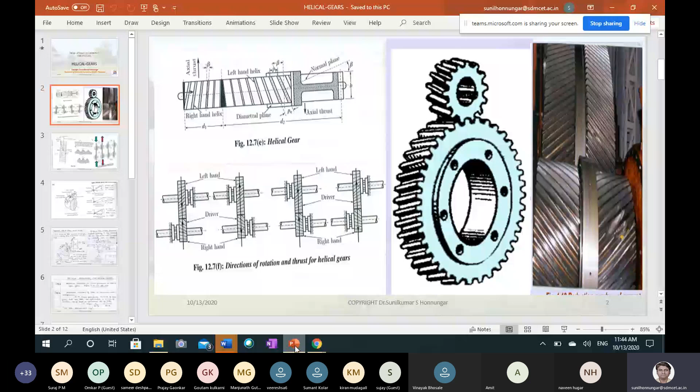Okay, I am continuing. Am I audible? If I am not audible, Rohan Rangoli, if he is there, please call my phone number immediately if my voice goes off. Of course, I get the information here in case of signal problem. Amit, please unnecessarily don't unmute yourself. I'll come to know who has muted, who has unmuted. Don't waste my time and your time as well. I'm just continuing, otherwise the continuity will go.

Okay, so that axial force will come. That axial force will be along the shaft axis. Just look into that shaft axis, and it is very interesting and sometimes confusing as well. Okay, 1 second, I don't know what happened. Am I audible? Yes, sir. Okay, fine.

So this is going to be the shaft axis. So what you have to do, looking into the direction of the rotation of the gear, you should use your right hand thumb rule. Suppose this particular gear, 1 second, this particular gear is rotating above. This is a gear, this is a pinion, smaller one is pinion, it is rotating in this direction.

So show your, I think I'll start my video. 1 second, I think I have switched my video off. I'll just start my video as well. I think still people are pouring in. Abhishek Naidu. 1 second. This is a problem. I think now you can see me. Okay, fine. 1 second. Share screen.

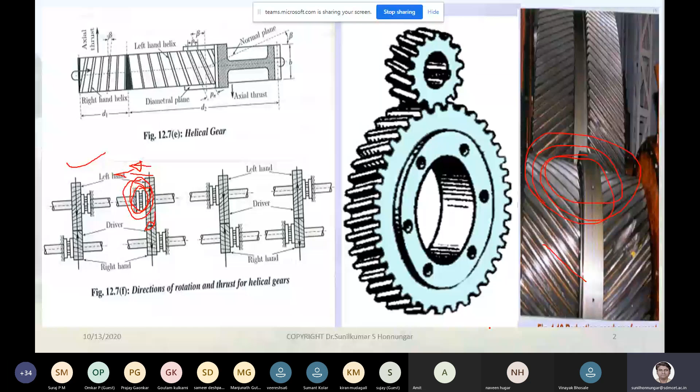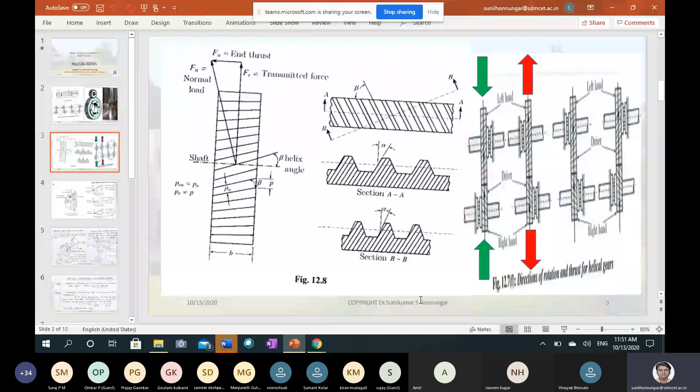I think when I share that, it will not come. I should stop sharing, then only video will come. That is what it is showing. Yeah, I think now camera is on. Okay, now I think so.

Just see. So this is my palm. Okay, so right hand palm, if you make the direction like this down, so this thumb will show the axial thrust. That is the top side gear.

Sir, not visible. Video is not visible, sir. Only voice is audible, sir. It's visible, sir, visible. Just check my video. It is visible, I believe. Can you see my hand? Yes, sir. Yes, sir.

You have to make the hand like this for the top gear. The fingers point the gear rotation, and thumb will represent the axial thrust for the top one. I'll again re-show that. You also make it and you will understand. For the bottom side, you have to make the palm like this, and fingers towards you. Why? Because the direction is downwards, and thumb represents the axial thrust.

Okay, I'll just stop the video and go back to sharing, and I'll show that. I think you have to do this exercise. You will understand it in a better way. Okay, just look into that.

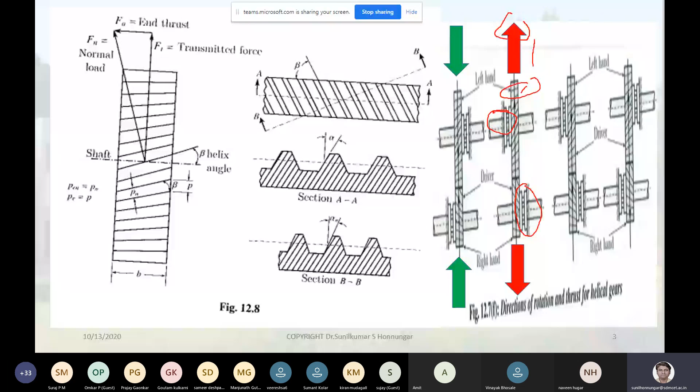And for the bottom one, all fingers towards the direction of arrow, and your right hand thumb will show the axial thrust, where you will have the thrust bearing. Similarly for these, which I am not going to explain in detail. You have to do this practice and see how the axial thrust plays a predominant role, and you have to take care of that in case of helical gear.

Now you see this on the right hand side. I have the gear. So can anybody tell me, is it an LH gear or RH gear? I told how to identify LH and RH gears. Anybody? Am I audible? What is the kind of gear, this one on the right hand side? Is it LH or RH? Anybody can recall what I told?

Anybody? Hello? Are you concentrating or no? Hello? Yes, sir. Tell me then, why are you not telling? Is it LH or RH? Quickly, any one of you. One second. Yeah, tell me.

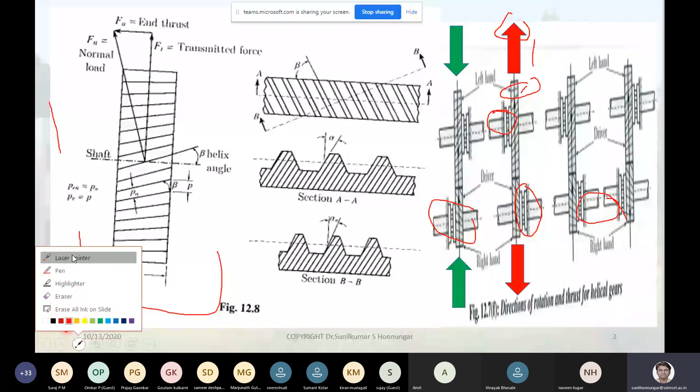I'll just go here and take a laser pointer. Beta is the helix angle, and there is alpha N, the normal angle in the normal plane, and the transverse plane and transverse angle. Earlier alpha N was not clear; I said I would explain it in the next slide. Normal plane means a plane perpendicular to the tooth profile, and transverse plane means the plane in the direction of rotation. Remember those two, which are not exactly perpendicular.

When you resolve the normal force, you get the tangential force FT, perpendicular to that you get the axial force, and you also get the radial force FR. So that is FR, FA axial, and FT. Just look carefully: this is FT, what I am tracing, and the vertical is FR, radial. In addition, there is an axial force FA along the axis.

This figure is given in your data book for FA and all. You have to refer to these equations and, with trigonometric correlation, find the corresponding values, which I will not spend more time on. It is page number 212 in your data book. I'll also open 212. There you see helical gear geometry and forces, with details of the normal force. For FR you have one equation, for FA you have one equation.

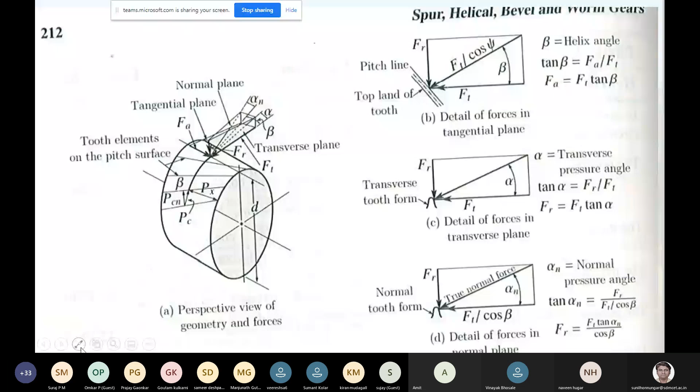Yeah, and again there is some more. This derivation is not there, but I'll try to explain with respect to this. There is something called virtual number of teeth. What is that virtual? If you just recall your first year engineering drawing, true length and apparent length, you remember? Anybody remember true length, apparent length? Yes, sir. Similarly, this. Mute, please.

Equivalent number of teeth means, I'll read it: it is the number of teeth equivalent to a spur gear in an imaginary plane perpendicular to the helix angle. This I will be sharing later, so you can pause, take a screenshot and write it in your notes. I think there is no derivation. Only you should remember there is something called equivalent number of teeth, the number of teeth equivalent to a spur gear in an imaginary plane perpendicular to the helix angle.

So I'll just show, this rectangle is the gear, and you have the helix angle, this axis. In a plane AA perpendicular to the helix angle, when you project that, you will get an ellipse. I think the equation of ellipse is there, with major axis and minor axis. So the number of teeth are more in that particular plane, because that area is more compared to this. So that is the virtual number of teeth.

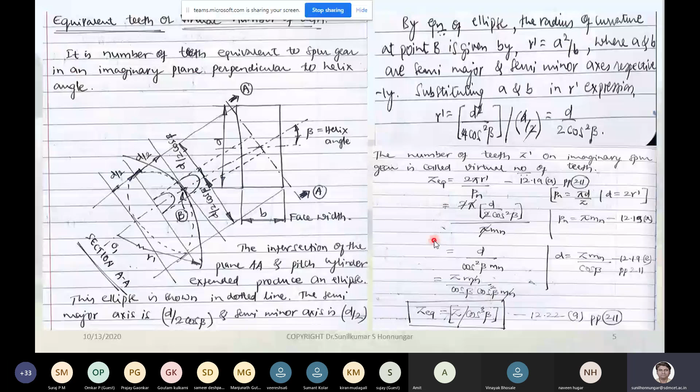So further, I'll just continue the design procedure. So any doubts anybody is having, I'll just pause here. So design procedure, it is almost same. So today I will complete the design procedure. Hardly there are some 4 or 5 slides, so they are self readable. Okay, this I will make a video, you can pause and go through and then make yourself.

Is that okay? Any one of you unmute and tell, is that okay? Hello. Yes, sir. Fine. Okay.

Design procedure for helical gear. This design procedure, of course, may be contradictory for you. I told you have to refer equations in helical gear, but now I am telling the design procedure is the same. Procedure means what? You had step number 1, selection of material, minimum number of teeth, design criteria, module calculation, dynamic, wear. Same procedure you have to follow, but equations pertaining to the helical gear section, you remember that.

Okay, the first step, it is repetition. Those who have not attended my previous class of spur gear, you can just see here and then make yourself. The first one is selection of material. In case material is not given in the problem, you have to follow the same procedure as that of spur gear. What is that? You assume both pinion and gear as the same material, and the third step can be avoided, because if the material is same, it is all the time the pinion which is going to be weaker. Okay, so you can do that and then continue. For that, you have to refer table 12.22, page 241.

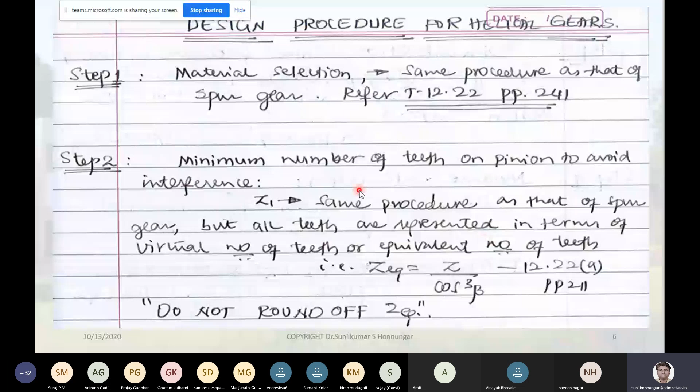Again, I'll read it out in continuation of the same step. In case a center distance between pinion and gear is given in the problem, do not assume a minimum number of teeth on pinion. This we have discussed very elaborately. If center distance is given, do not assume the number of teeth, because if you assume the number of teeth, your module will get fixed. Do not assume minimum number of teeth. For that, you use Barth equation, similar to what you did previously.

In case of spur gear, note the module you estimate here using Barth equation is a transverse module. Transverse module means module in the direction of gear rotation, and do not round this off. Please note down. Generally, after calculating the module, you used to round off the module in spur gears considering the standard table. But here, please do not round off that module. Keep it as it is. Convert that module into normal module.

What is the normal module? Mn. Whatever you get from Barth equation will be m. Keep that m as it is and convert it into mn using relation 12.19c. After getting this mn, you round off referring to the same table, table 12.2, page 229, which you referred to for spur gear. That is the first choice. For the second choice, you do the same thing here as well.

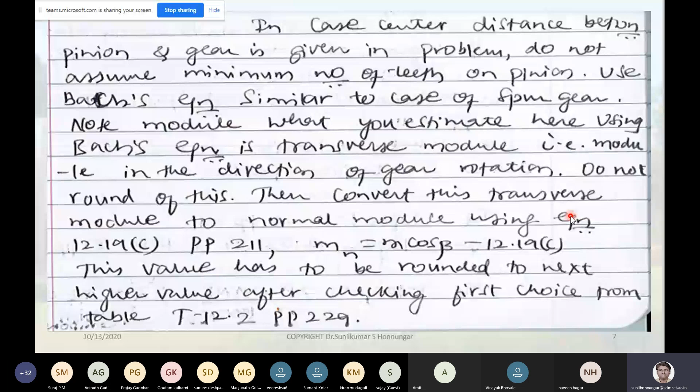I'll just go to the next slide. Another couple of slides are there. Shall we stop here or shall we continue? Hello, anyone? Shall we stop or continue? Anybody? Continue in the next class. Continue, sir. Okay, fine. With this slide I'll continue, because it's already 12:15. I don't want to burden you. With this I'll just stop.

The next step is design criteria. Design criteria is the same as that of spur gear. In spur gear, you did sigma d into y of pinion and sigma d into y of gear; whichever is the smaller quantity of these two is the weaker one, and your design criteria will be based on that. If the product is smaller for pinion, pinion is the design criteria. If the product is smaller for the gear, gear is the design criteria.

Remember, y is the Lewis form factor. In that Lewis form factor, in place of z, you should substitute z equivalent. Why z equivalent? Because it is on the imaginary plane you have considered, so it is not real, it is virtual. That virtual number of teeth you have calculated, you should substitute in the same expression. There is no separate equation given.

I think again I'm contradicting. Why? I told you to refer equations from helical gear only, but for helical gear they have not given a separate equation for this. Only for this you should refer to the spur gear Lewis form factor equations. Again, in place of z, substitute z equivalent. Other than that, the rest is the same. Whichever product is smaller is going to be the design criteria.

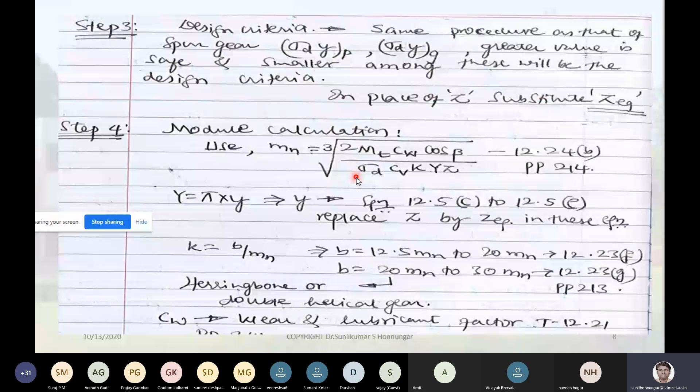Yeah, here it is the helical gear. So module calculation, same thing. Capital Y is again pi into y. So here for 12.5c, you replace z by z equivalent in that expression, that I have already told. And b equal to k into mn. So b is 12.5 mn to 20 mn. Earlier it was 9.5 to 12.5. Here it is 12.5 to 20 mn, for a single helical gear.

Herringbone, or double helical, is something like a tractor wheel. Just see, this is the gear, this is the pinion. So this is called a double helical gear. This is RH, this is LH. Again, this is LH, this is RH. RH will meet LH of this part, and the LH of this will meet RH of this part, but it is one unit only. Generally they are made separate, then grouped together and fixed to make one unit. So this is a double helical or herringbone gear.

For that you have a separate B relation. B should be between 20 mn and 30 mn, which is given in expression 12.23 G, page 213. And CW is the wear and lubrication factor. Wear, as you are aware, because the contact is continuous along the tooth profile and more than one tooth is in contact, wear is going to be more compared to the spur gear. So you must take that factor into account, that is CW. You have three different cases.